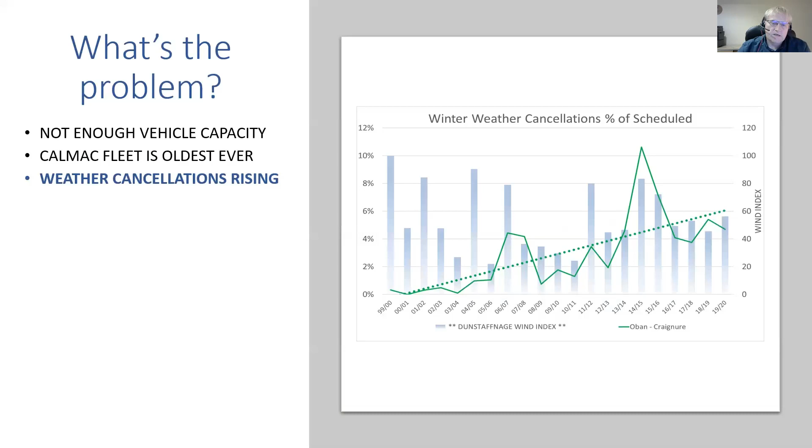There are two sides to this. There's what's been happening to income, but there's also expenditure. Over this period, the sort of second third of it, we've had RET introduced, so more people are being carried, and the fare revenue from those passengers has gone down pro rata because of RET.

But our costs are still going up, and those costs, the subsidy, was rising before RET, and it's now leveled off at £140 million a year, which, to put in context, is more than the education budget of both Argyll and Bute and the Western Isles combined. So we are spending more on the operating subsidy for CalMac than we are on educating our kids.

So whilst RET is a great thing, it does put greater pressure on the need to reduce costs and make sure the ferries are as efficient as possible. These rising subsidies are not the fault of RET, they are more to do with the declining efficiency and productivity of the ferry system.

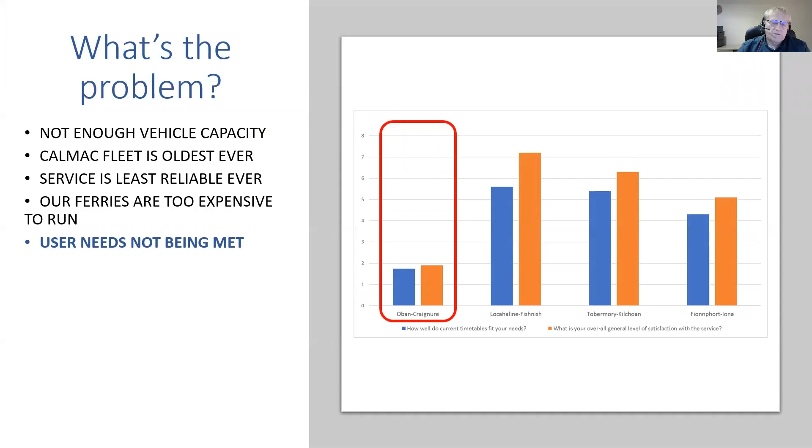So why is it that one particular service is ranked so poorly? Well, the biggest issue, as we'll see, is reliability. Oban-Craignure has become far less reliable. As we saw higher up the presentation, the data shows that, and people recognize that. Their perception is 82% of people perceive the service to be getting less reliable. They know it's getting less reliable, and they're having much more difficulty traveling in the winter when they want to. So that's the big issue for the Oban-Craignure route, and why it is singled out amongst them all: it's all about reliability. It's becoming much more fragile in the winter.

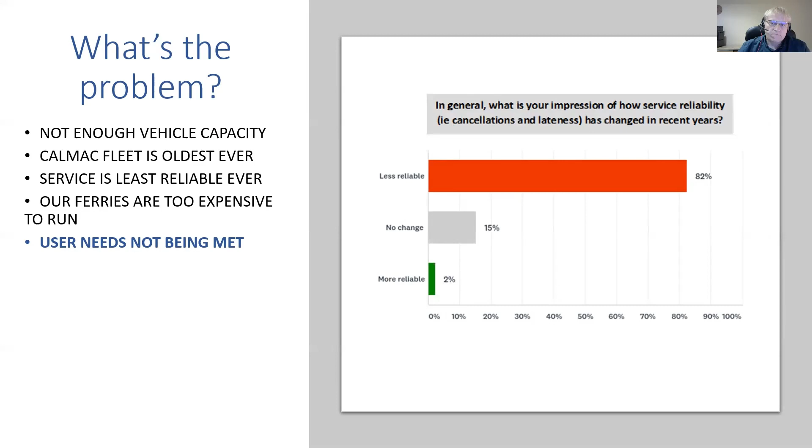We also have the general problem of our timetable aspirations not being met. A ferry that is expensive to run means it's expensive to add on extra services at the beginning and end of the day. So we want things like a longer sailing day in the weekday and at the weekend, and we want increased frequency. We want better connections with public transport. All of these things are difficult to achieve when the ferry we're reliant upon is so expensive to run.

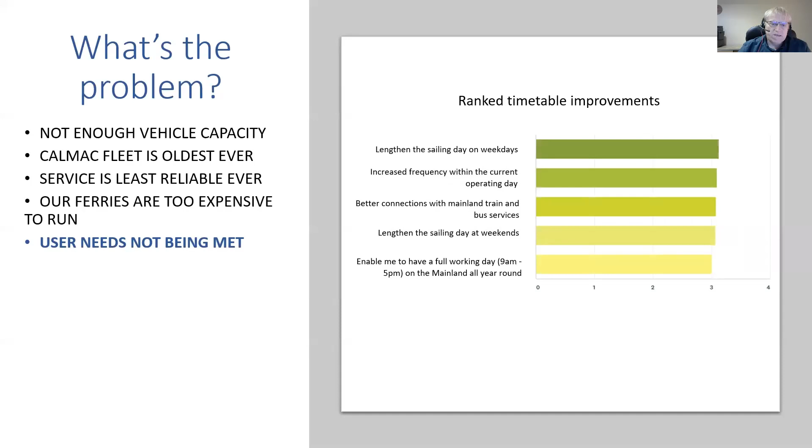Alongside the obvious things such as having sufficient car space on the car deck, fares should be affordable. Well, we're lucky that fares are pretty much affordable now, but there is the worry that with continuing high levels of subsidy in the ferry service, those affordable fares might one day be threatened by the need for such high subsidy. And we also want high frequency. Those are our four most important priorities.

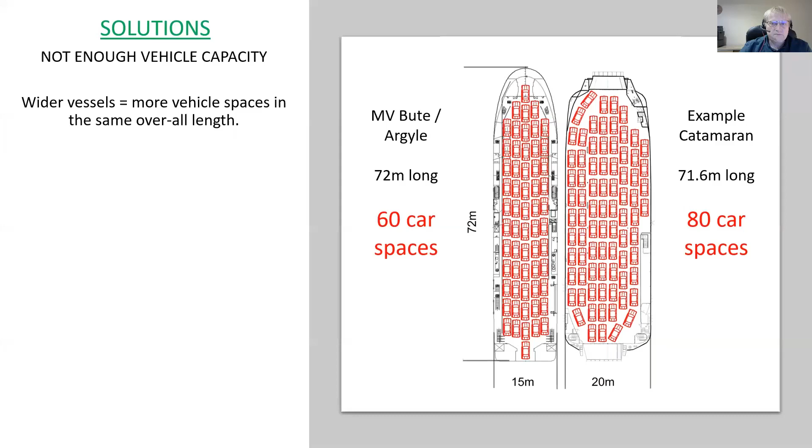It's a feature of catamarans at every length. When you consider a catamaran of any length next to a monohull of the same length, the catamaran will always carry more vehicles, as you can see in this comparison here between CalMac vessels and typical catamaran capacities.

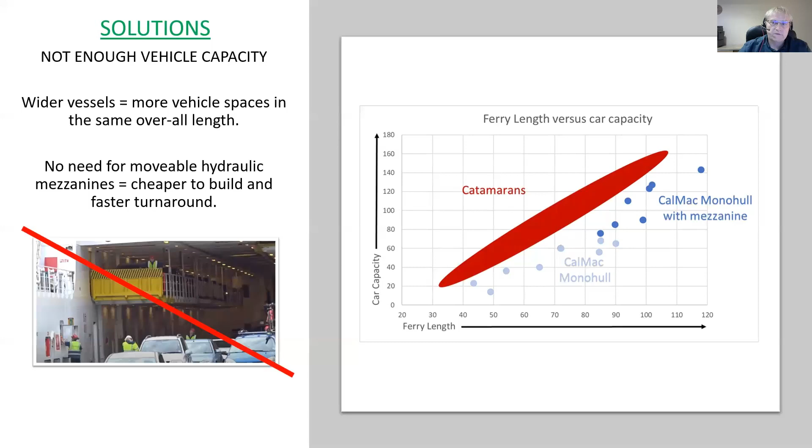And particularly, a catamaran can offer this extra capacity without having to do things like put in movable hydraulic mezzanines as you do on a monohull, raising and lowering cars up into the ceiling of the car deck. Those expensive mechanical solutions to adding capacity aren't needed, which saves costs and also saves on turnaround time, which is key on a high frequency ferry service like our own. That's one of the reasons why catamarans are cheaper to build. Alf has gone through many of the other reasons why they're cheaper to build, because of their simple design.

And so we're adding there to our list of solutions. The next problem that we need to address is this running cost problem. The running cost is comprised of two main factors.

That's fuel and crew. So looking at crewing first of all, here's the MV Isle of Mull, and her crew is 31 in the summer, 27 in the winter, and to operate full time she needs 2.2 crews approximately, which over the course of the year costs just over £3 million. So the main driver obviously there is the number of crew.

Obviously there's a debate over whether the crew should be based on the ferry or not. We'll put that to one side for the moment. The thing to focus on first of all is the number of crew that are needed to operate the ferry - it has a huge bearing on the cost of running the ferry.

So the main driver of the required crew count on the ferry is the passenger capacity, or specifically the passenger certification. The MCA will determine the minimum safe crewing levels at a particular passenger carrying limit. That's all about how many crew you need to operate lifeboats, to fight fires, to keep people safe if the ferry were loaded to its safe maximum, which in the case of the Isle of Mull is 962, and it reduces to just over 500 in the winter.

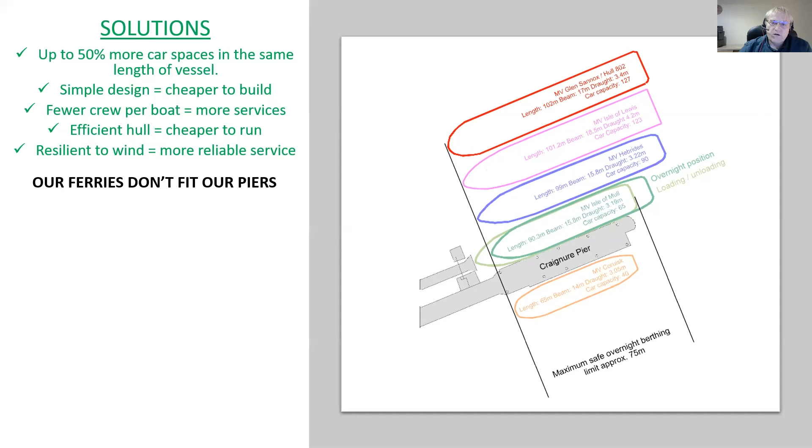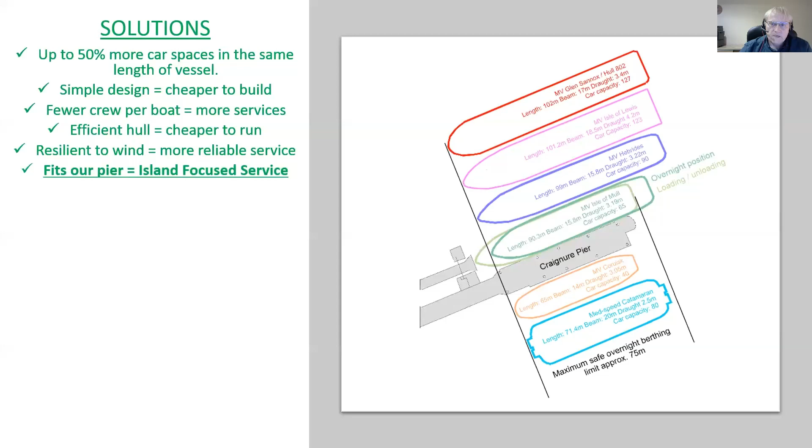So our final problem is the aging fleet problem. Obviously the only solution to this is a faster pace of ferry replacement, and that would be affordable if those ferries were cheaper to buy in the first place. That's what makes the case for cheaper, more value-for-money ferries—you can afford to replace them more quickly and renew the fleet.

In the interim, there is a potential solution: buy whatever you can find on the second-hand market if it's suitable. That's exactly what the Scottish Government have set out to do in recent years. They've tasked CMAL, the vessel-owning company, with searching the second-hand market worldwide for ferries that could be bought, suitable to operate on the route, and added quickly and cost-effectively to the fleet.

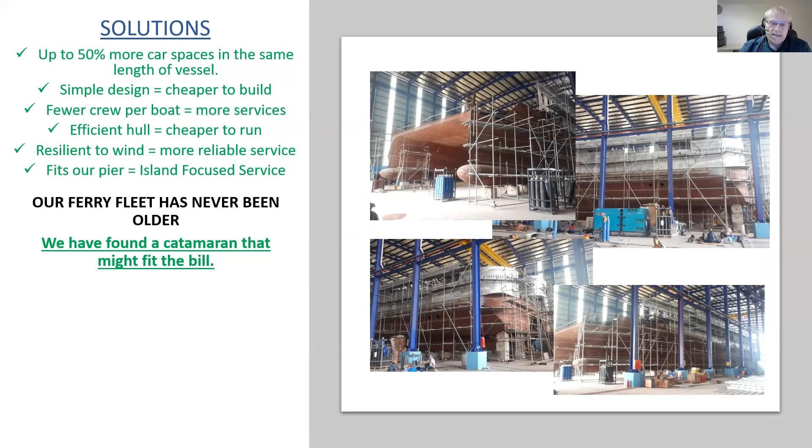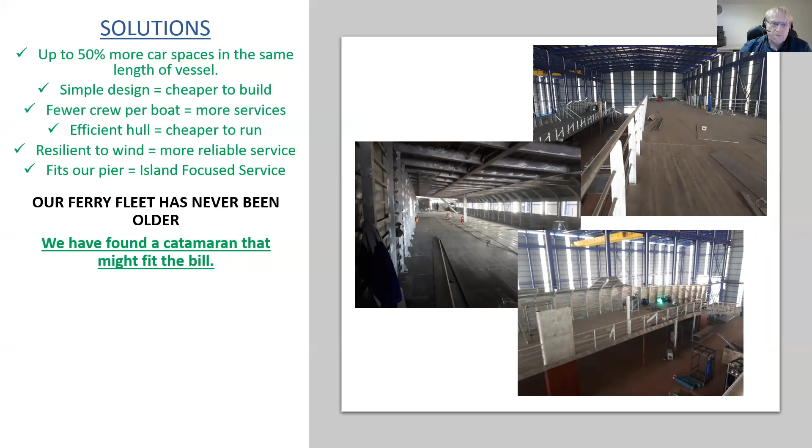So far, they haven't managed to find anything suitable. But over the summer, we believe that we have, and this is it—it's a catamaran, of course. It's being built in Indonesia for a customer who now wants to delay their purchase to a later build slot, if possible, so it's being offered on the open market to see if there's an alternative customer out there. It's nearing completion and should be launched early next year, so decisions have to be made now before the opportunity is possibly lost. But there it is—that's it, under construction in Indonesia.

Here are the key drawings of the ferry, showing all its main particulars, which are suitable. It's not too long—just over 71 meters. It has a draft of 2.5 meters and a car capacity of 80, and its passenger capacity is about right. It would benefit from a slightly larger passenger capacity, but that can be addressed, as I'll show in a moment. In terms of its key attributes, it's a good fit for the service, and it's being offered for sale at just over £9.5 million in its currently designed state—so it seems to be very good value for money.

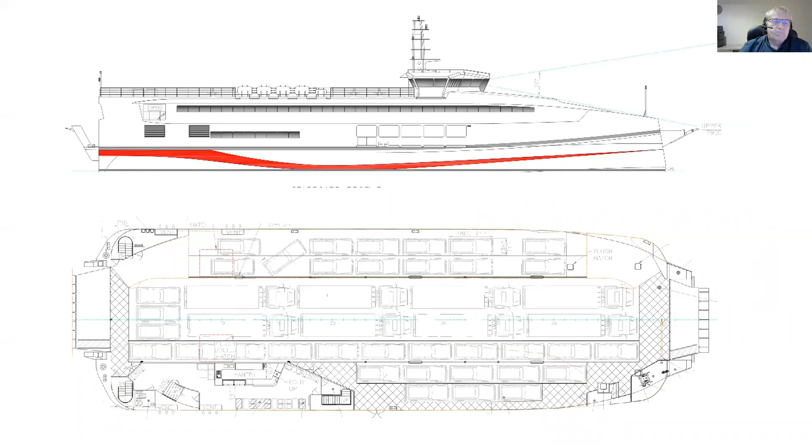Now I'll take you through a couple of slides showing those drawings in more detail. It's difficult to make out these line drawings, but that's the car deck. I'll take you up through the decks—the passenger accommodation to one side and a mezzanine car deck to the other. As you can see, it's open through the length of the vessel, so it can carry dangerous goods, no problem.

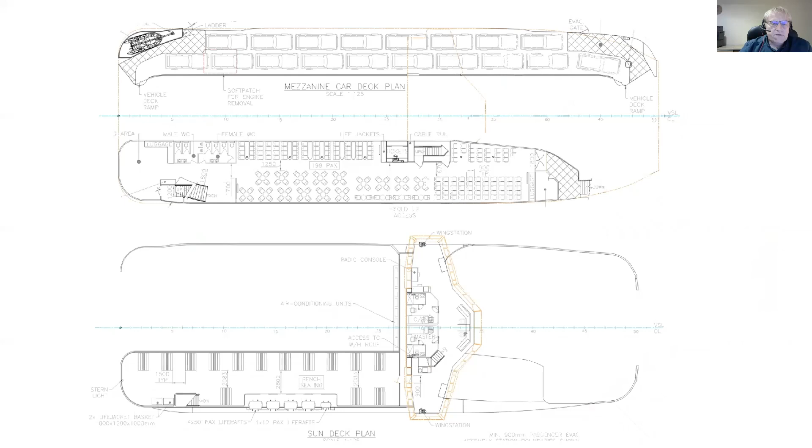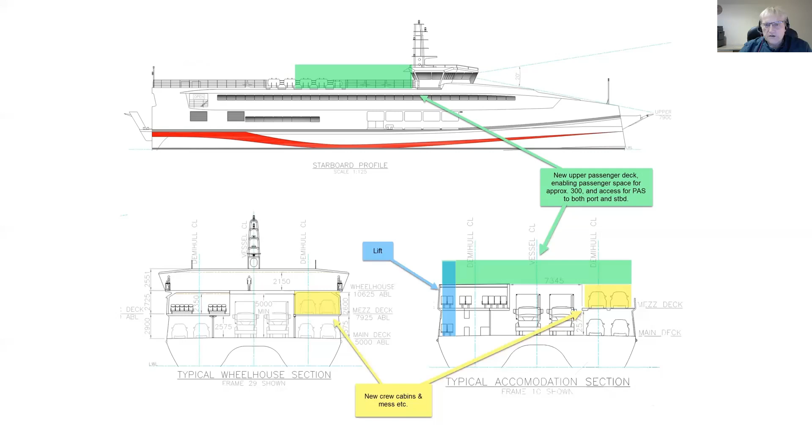It will need some modification to suit CalMac's operational needs, the key one being the addition of crew cabins. There's a perfect space for that on the mezzanine car deck, which could be sacrificed to make the crew cabins—you lose a little car carrying capacity, but not much. It needs a lift added, and significantly it needs another passenger deck added behind the bridge, which would not only increase its passenger capacity but also enable it to line up with the passenger access systems in Oban-Craignure and every other port in the network.

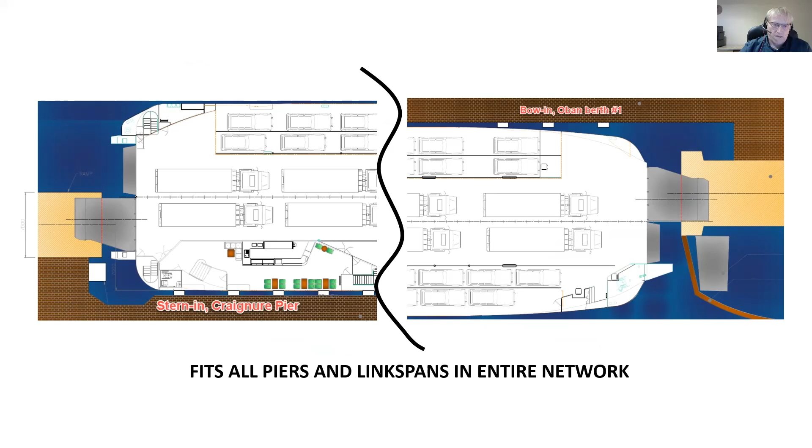The other key thing it needs to do is line up with our link spans, easily achieved by adding twin ramps at each end. Rather than one central ramp, you have two ramps to port and starboard, and regardless of the vessel's orientation—bow in or stern in, starboard side to or port side to—the inboard ramp will line up with the existing link spans. The older link spans particularly were designed for vessels of 14-meter beam, so using that geometry, twin ramps centered 7 meters off the fender face would fit with every link span, every pier in the entire network—so it can be used everywhere without restriction.

So here is our final list of these full solutions, and the key one, which I'll finish with, is our island-focused timetable and all the advantages that can bring us.

By basing the ferry on the island, we would be able, for the first time, to get the 9 o'clock train that leaves Oban every day of the week, a simple public transport connection we ought to be able to make, but can't at the moment, just because of where the ferry is based. So just by moving where the ferry starts its day, it makes a massive improvement to public transport connections.

So we get an earlier start to the day. We can leave the island earlier, and we can return later, with a 6 o'clock return every day. That gives you a much longer day on the mainland, with more time to go about your business and more time to travel to get where you want and return again the same day.

It's more convenient in every respect. Those 4 extra hours on the mainland give you so many more options and so much more flexibility, whether you're driving a car or getting public transport. That improves the weekday timetable and gives us many more options for the weekend as well. So it would really transform our service just by the simple act of changing where the ferry starts and ends its day.